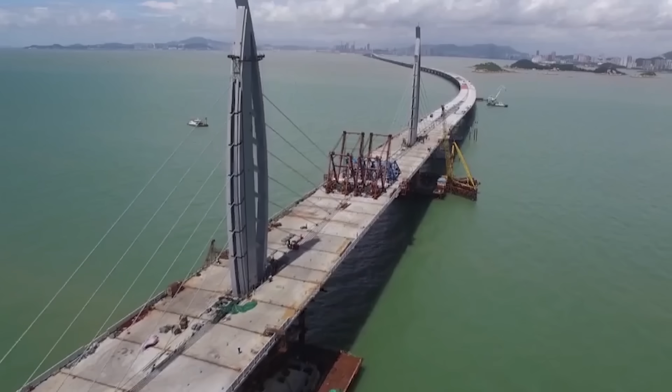How do people around the world connect areas separated by bodies of water? Some countries build massive bridge structures over 93 miles long, letting trains or cars easily cross huge stretches above the water. There are also tunnels that help to get across bodies of water, but with a few advantages over bridges.

The distances are shorter here, though there are examples where the number of miles you have to cover underwater goes over 18. And now take a look here.

The Strait of Gibraltar is a place where Europe and Africa, Spain and Morocco, are just 8 miles apart. And yet, there's no bridge, no tunnel, even though that could revolutionize the economy and transport systems of several countries at once.

However, chances are the situation will change pretty soon, because Spain and Morocco are working on an ambitious transport megaproject over 25 miles long and costing around $15 billion, which will finally connect the two continents at the most convenient point. Today, we'll take a look at what exactly they're planning to build between the two continents.

Obviously, in the place where Europe and Africa are the nearest to one another, a route connecting them was bound to appear. Today, you can cross from Morocco to Spain, or the other way, by water transport, like ferries. The important thing is to avoid traveling these routes during rush hour.

For example, in summer, when the so-called Operation Crossing the Strait takes place, a major yearly logistics operation organized by the Spanish authorities to manage and ensure the safe and smooth transit of people and vehicles from Europe to North Africa. It's one of the biggest logistic events in the world.

For example, in 2024, a record was set: over 3.4 million passengers and almost 846,000 vehicles passed through Spanish ports. Obviously, such a load is a big problem for ferry transport because there were traffic jams and serious delays.

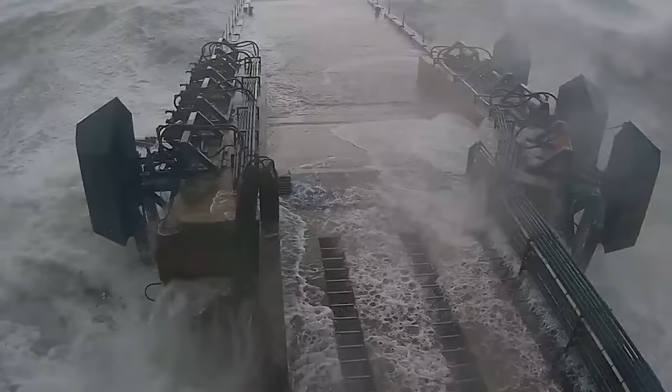In 2014, for instance, that led to wind speeds reaching 69 miles per hour. So during strong winds, the ferry won't let anyone board. It'll just wait for better weather, because this kind of transport isn't made to be rocking with people on the waves. That means a person who urgently needs to get from one shore to the other simply won't be able to do it at any given time.

Besides passengers and cars, goods also travel across the strait from one shore to the other, quite actively too, since this is the most convenient spot for trade between Morocco and Spain, and between several European and African countries at once.

For example, one of the main Spanish ports near Gibraltar, called Algeciras, reported in 2023 that almost 392,000 units of freight vehicles were shipped through it heading to Morocco. Another source forecasted that the number of trucks and other vehicles sent from Spain to Morocco would grow to 500,000 units. The total volume of goods moved between Spain and Morocco is also at a decent level.

For instance, in 2021, the Spanish port authorities reported that the country's main coastal facilities handled about 14.5 million tons going to Morocco. But since cargo moves by sea transport, in some cases there can be delays. Or if bad weather hits, then the cargo doesn't move either and waits for things to get better. All that means more time. And in trade, extra time means less money, so many companies might not be too happy about sea freight in this area.

All this points to the fact that a more familiar route through Gibraltar, where you can go by land, has been overdue for a while. Of course, the idea of building a bridge came up. Why not? Structures like these are made to overcome obstacles like water.

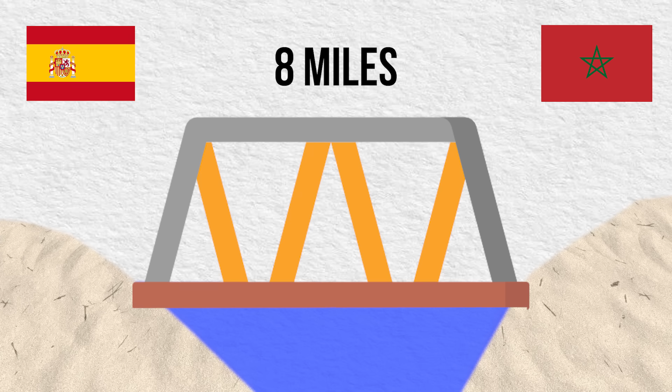For example, there was a proposal from Tung Yen Lin, a Chinese-American civil engineer. He came up with the idea to build a bridge 8 miles long, enough to cross the narrowest part of the strait. Besides that, the proposed design was supposed to have a span of 16,400 feet, which is twice as long as the longest span of any existing bridge right now.

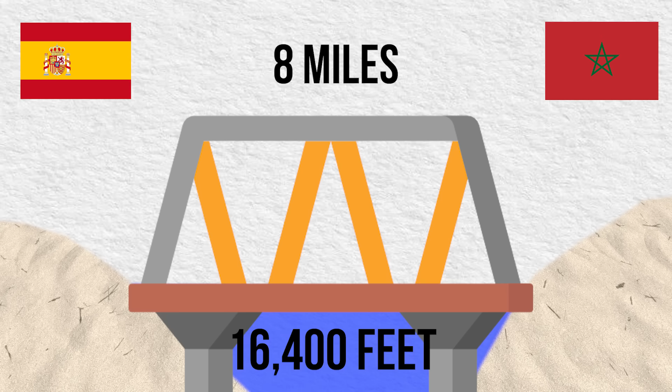How much would it cost? This was the hot question on everyone's mind as soon as the idea came up. According to the estimates, building a bridge connecting Europe and Africa would cost around $15 billion.

Besides the huge price tag, a bridge isn't the most reliable way to connect two countries. Weather could make it so that vehicles crossing the bridge wouldn't be able to get safely from point A to point B. So maybe a tunnel?

Yeah, of course that was suggested too. Even in 1930, there was a tunnel project planned by the Spanish side. However, the Spanish did their research and realized there was really tough rock under the bottom, which would have been a total roadblock for the technology they had at the time.

So does that mean the continents can't be connected at all? Well, that was back then. But these days, technology is way more advanced, and Spain and Morocco want it way more than before. Economic growth, bigger trade volumes, more people moving between countries. Basically, there definitely needs to be a way to get through safely, not by swimming.

And just recently, there's been another bold tunnel plan. Back in 1979, the Spanish-Moroccan Declaration was signed, and one of the outcomes was the creation of SECEGSA in 1981, a corporation funded by the Spanish government with a clear task to explore the idea of building a bridge. However, in 2003, the decision was made to go with an underwater tunnel after all.

Obviously, the tunnel should be built where the distance between the shores is shortest. But it's not that simple. The new tunnel won't be built there. At the narrowest point of Gibraltar, the depth reaches 2,950 feet.

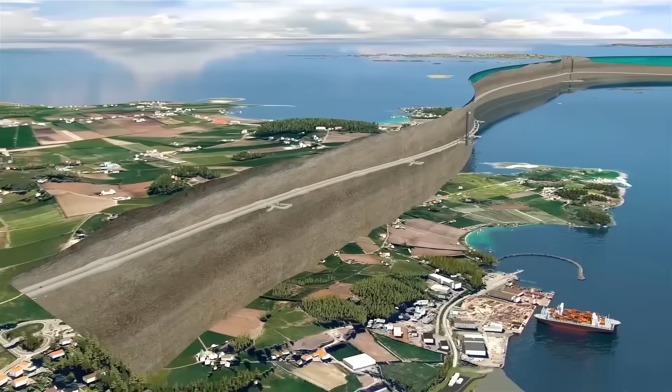For comparison, the deepest underwater tunnel right now, the Norwegian Ryfylke, sits 955 feet below sea level. Also in Norway, another tunnel called Rogfast is being built, which will lie at a depth of 1,280 feet below sea level. Overall, 2,950 feet is a huge number.

And honestly, it's not clear how to even pull off a project like that. There's no real experience. In the end, according to the plans, the tunnel will follow a different route in an area known as the Camarinal Sill, where the depth ranges from 980 to 1,640 feet.

As stated, the final length of the tunnel will reach 26 miles, 17 of which will be underwater. But this way the project can be carried out with way fewer complications and dangers.

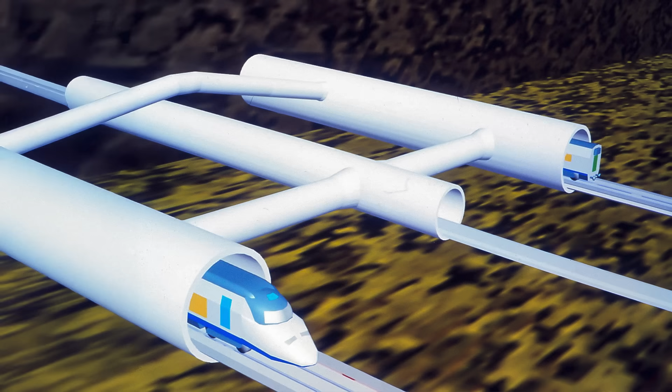The tunnel will be built for trains, and the track layout includes two tubes, each with a railway line, one for trains heading to Morocco, the other to Spain. At the same time, there will be a service tube in between them used for maintenance work and evacuating people in case of an emergency.

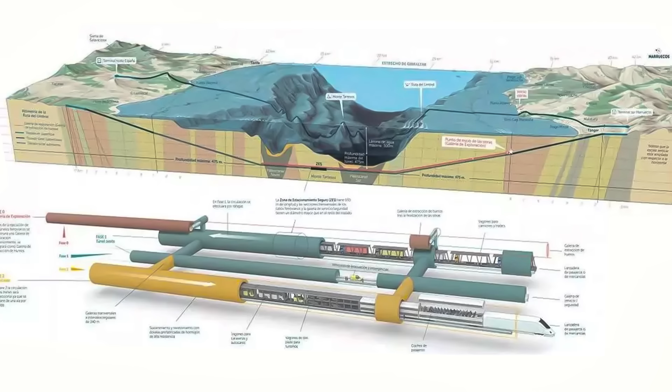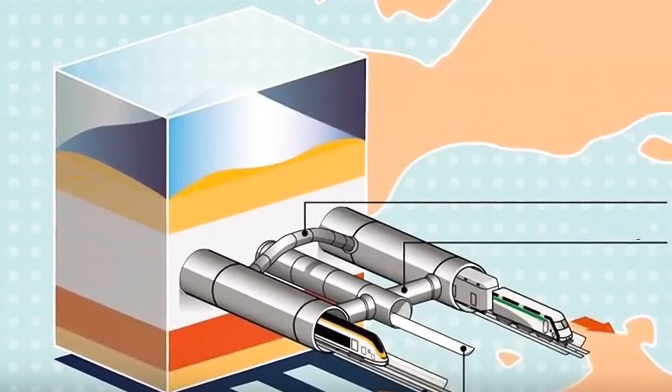So basically, the design will look a lot like the Channel Tunnel. Two tubes underwater, only this one's deeper and shorter. Plus, the engineers say building the Channel Tunnel was much easier because of the geology in that area.

To assess the strength and stability of the rock formations, Spain allocated 2.3 million euros in January 2025 for a geomechanics research program, under which the German company Herrenknecht is carrying out seismic drilling surveys of the Strait seabed. By the way, the fact that Herrenknecht is involved gives us another hint about the new tunnel. There's clearly going to be a ton of work involving tunnel boring machines, since Herrenknecht is one of the leading producers and users of that kind of tech.

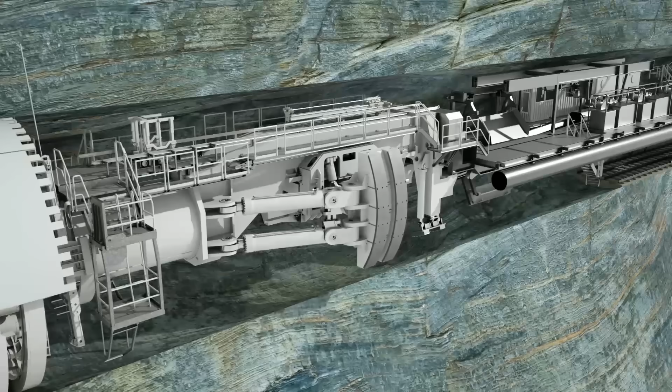At the work site, you might see a machine like this one. It's called a gripper. These are high-performance machines specially designed for tunneling through solid rock.

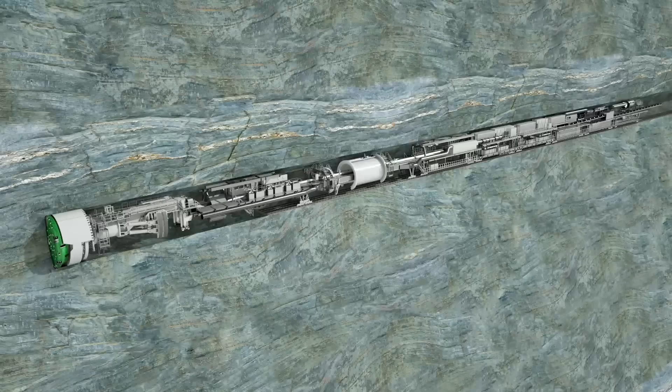They move forward by pressing hydraulic grips against the tunnel walls, while a rotating cutter head with disc tools breaks up the rock, which is then cleared out. Thanks to this, gripper machines can achieve high tunneling speeds in the right conditions.

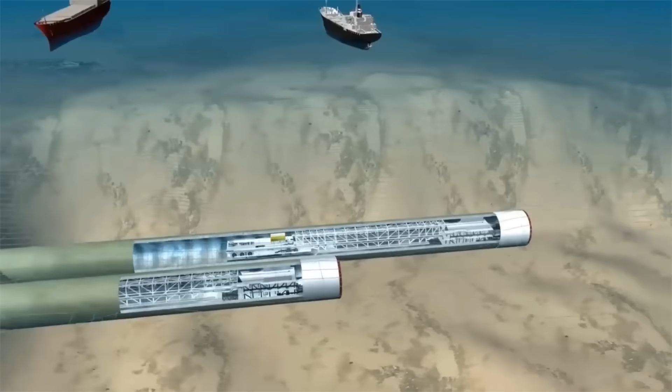Chances are mixed shield machines will show up too - tunnel boring machines designed to work in mixed ground where geological conditions can shift suddenly. In short, if you start off with soft soil and then hit something hard, that's going to be a problem for a lot of TBMs, but definitely not for this one.

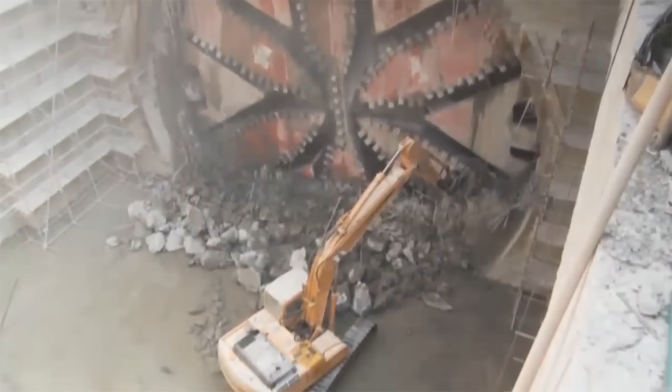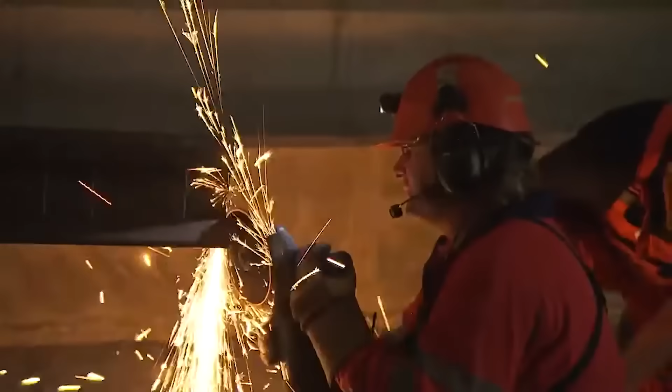And those two types of machines clearly won't be the end of it. There'll be loads of equipment. And the traditional drill and blast method obviously won't be left behind either. All in all, the scale of the work is going to be absolutely massive.

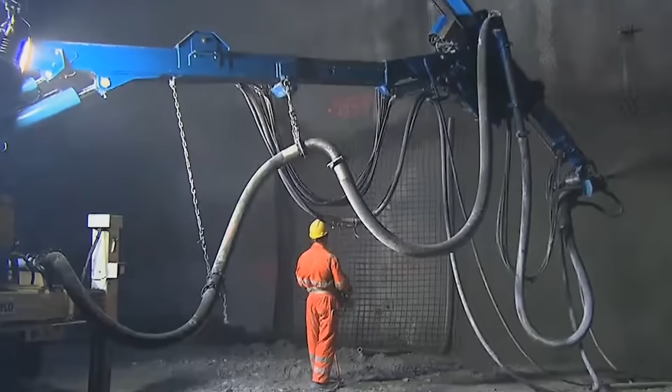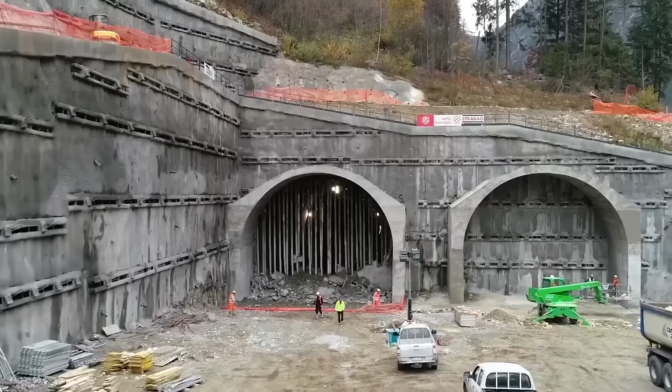Experts estimate the project's cost at over 15 billion euros. That figure includes not just laying the main tunnel, but also building coastal tunnel boxes, ventilation engineering stations, and emergency exits, as well as integrating with terminals designed to carry cars, similar to the Channel Tunnel. On top of that, the project features a pressure drop system for natural ventilation and multi-zone airlock chambers to seal off sections in case of emergencies, all in line with top international tunneling standards for earthquake-prone areas.

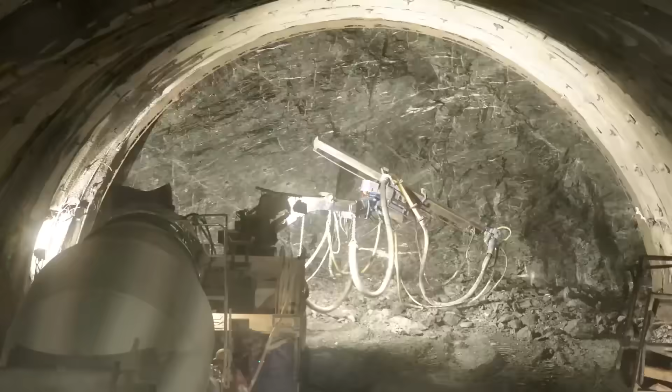But it still doesn't quite feel like it adds up to 15 billion euros. Thing is, a decent part of the project's cost comes down to how insanely complicated it is to build a tunnel through Gibraltar, especially compared to other similar builds.

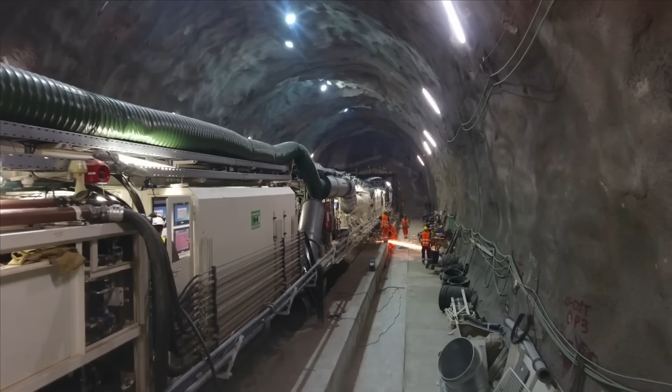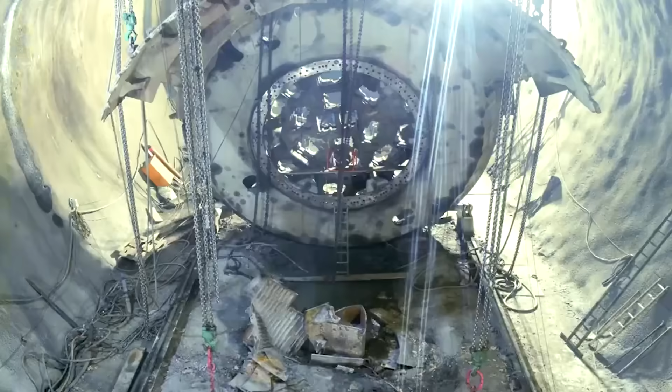For example, due to strong underwater and near-surface currents that can interfere with installation work and foundation structures, they're proposing to use special drifting locks and bypass channels to divert water during the assembly of the tunnel boring shield. The area is also seismically active.

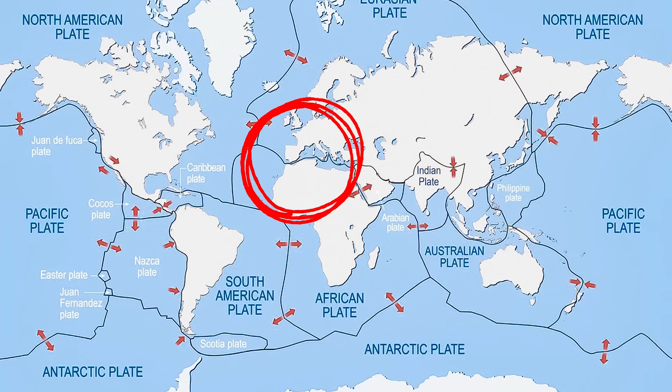Here in the Strait of Gibraltar, the Eurasian and African tectonic plates collided and are still pushing hard against each other, and the whole region can definitely feel it. Well, the builders will feel it too, hopefully without any accidents. That's exactly why safety will have to be taken seriously, and of course, that means extra costs.

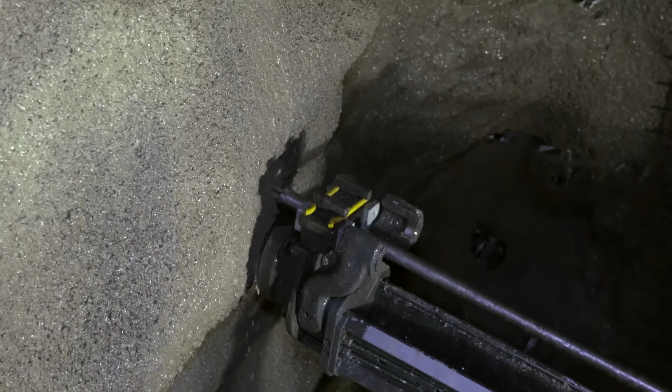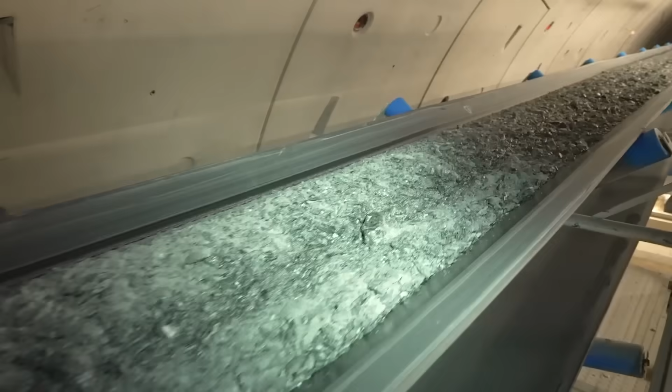According to analysts, once the design phase and lab tests are done, work will begin on prepping the construction sites and purchasing tunnel boring machines. Delivery and installation are expected between 2026 and 2028. Full-scale tunnel construction could kick off in 2030, with the first passenger services roughly around 2040.

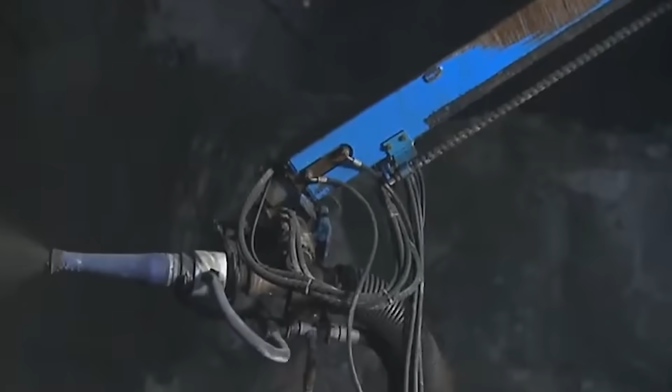But this estimate is far from final. The project is incredibly complex, and it comes with so many specifics that nearly every task will need its own custom solution. It's a world-class challenge, one they'll surely pull off, no matter what it costs Spain and Morocco.

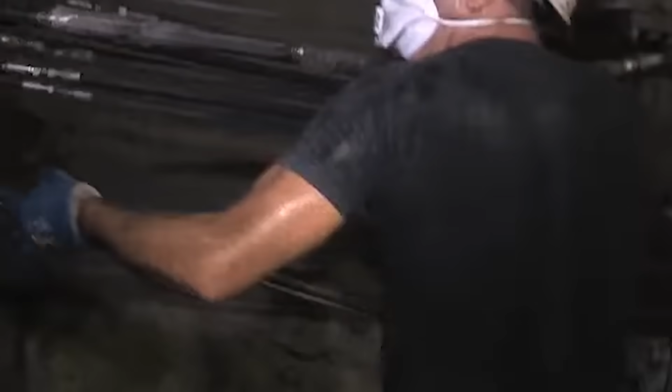Why? It's all about the payoff. Of course, first thing when the tunnel's built, Moroccan and Spanish companies will lose less because of delays and other issues tied to the current routes through Gibraltar.

One tunnel can actually give a real boost to economic ties between these two countries. The tunnel is also rightly called the door of Africa to Europe and vice versa, because after it's built, Africa will be directly connected by land to Europe.

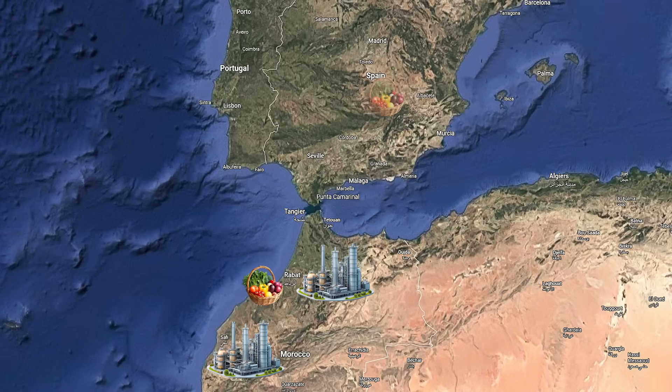In case the tunnel is built, Europeans will find it way easier to move their production, service it on Moroccan soil with cheaper labor, and then ship products back from another continent to Europe. In the end, Morocco will get whole factories that both produce goods for the local market and create jobs, and European companies will be really happy they managed to save on certain costs. Sounds like a perfect scenario.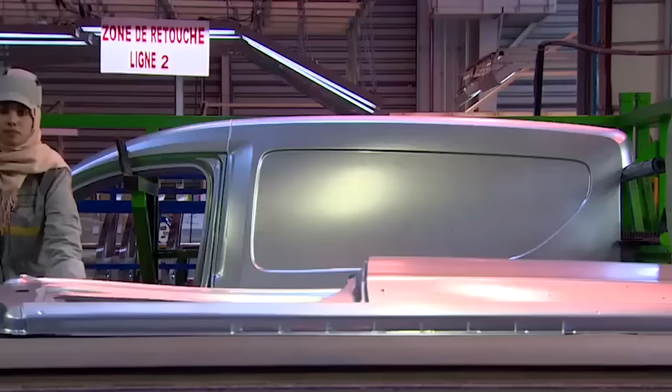For example, Renault from France and Stellantis from the Netherlands have already opened their factories in Tangier and Casablanca, so there are more cars in Morocco now. And a ton of jobs are popping up because car factories mean lots of job opportunities.

And now, imagine this. Thanks to moving the production of these two companies in 2023, Morocco became the biggest car supplier to the European Union. Surprisingly, it even left behind China and Japan, those big players in the car market.

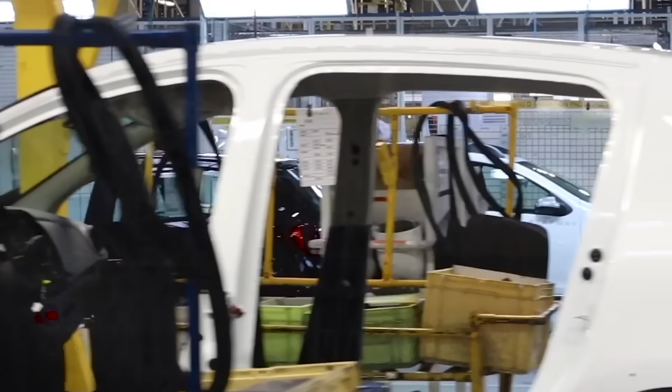At the same time, Morocco isn't planning to stop. The government set a goal that within a few years, the country has to do everything to start producing 1 million cars a year. And by the end of 2025, they're already expecting Morocco to produce 800,000 cars, so there's not much left to reach that ambitious number.

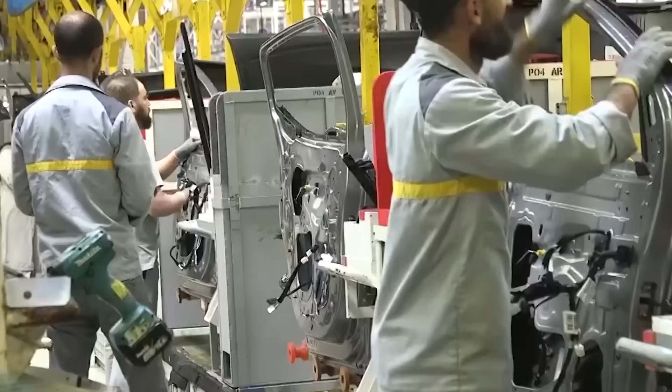And let's not forget, Morocco does all this without a tunnel. When a new route through Gibraltar opens up, the country will have a great chance to boost car production, as well as ramp up capacity at other factories, all without worrying about major delays anywhere that could cause economic losses.

Of course, we can't forget about another kind of trade between Morocco and other African countries with Spain and some European states. Basically, once the tunnel through Gibraltar is up and running, these countries will have a route that lets them deliver goods with less risk and in some cases in a shorter amount of time.

For the Andalusia region and northern Morocco, the project will become a driving force for infrastructure growth. The Spanish port of Algeciras, which already handles over 109 million tons of cargo a year, will get the chance to shift some of its cargo flows from sea terminals to rail trains. This will ease the pressure on overcrowded docks and create demand for new warehouses, sorting centers, and service areas along the tunnel route.

The same story goes for the Moroccan port in Tangier, which handles millions of tons of cargo every year. Thanks to the new tunnel, it can now send part of its trade flows by rail, freeing up capacity for other tasks. This kind of relief can help put the freed up port capacity to use for trading with new partners or boosting trade volumes with old ones.

The passenger sector will also be a key beneficiary. The idea of a high-speed train that can get someone from Madrid to Casablanca without having to change vehicles will shift the way we see cross-border travel between Spain and Morocco, and between Europe and Africa as well. First of all, everything will happen way faster than it does now. Second, traveling only by train is just way more convenient. And third, you'll be able to move between continents not only when the weather's right, but anytime you need.

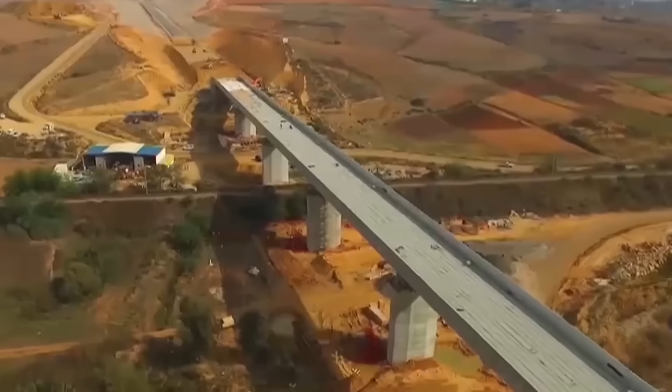From the perspective of the EU and the African Union, the project has not just economic, but also geopolitical weight. Amid growing volatility in sea routes and risks linked to climate disasters and regional conflicts, the land corridor will strengthen the security of critical resource transit from food and medicine to gas and electricity.

Duplicating the sea route will also build a reserve branch for the Continental Railway network as part of TEN-T, or Trans-European Transport Network, and PIDA, or Program for Infrastructure Development in Africa, improving the resilience of logistics chains on the scale of intercontinental markets. However, the question of how exactly the two countries will be connected by the railway still needs to be solved, because right now there are some issues with that.

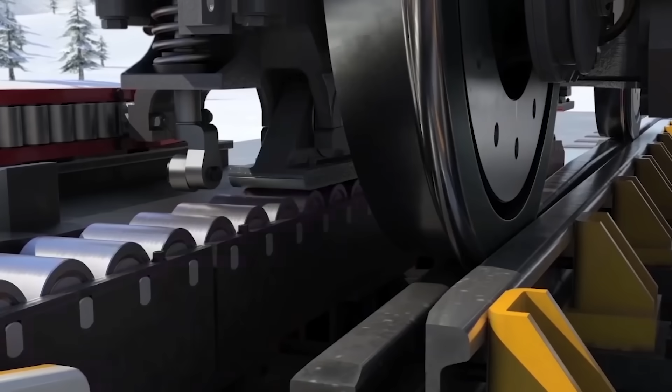Most of the Spanish railways, especially in the southern regions, use the wide so-called Iberian gauge of 66 inches. At the same time, Morocco has fully switched to the standard European gauge of 56 inches. This difference makes direct rail connections between the two countries impossible without complicated technical solutions. When it comes to the tunnel project, it means you can't simply dig a route underwater and link the two countries. A system needs to be developed that lets trains run freely between the two continents.

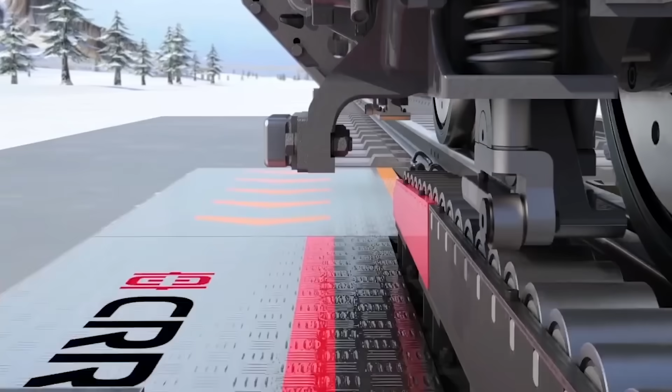One option is to build gauge changing stations on both ends of the tunnel, where special equipment, either automatically or with staff assistance, changes the train's wheel width. This setup's already in use in Spain to connect with France, but it requires time and additional expenses.

Another more ambitious option is to make the tunnel part of a new integrated network. Spain's already actively building new high-speed lines with European gauge, including in the southern regions. The tunnel project could be directly linked to these new lines, which would allow trains from Morocco to reach major Spanish cities without any hurdles and then go on to the rest of Europe.